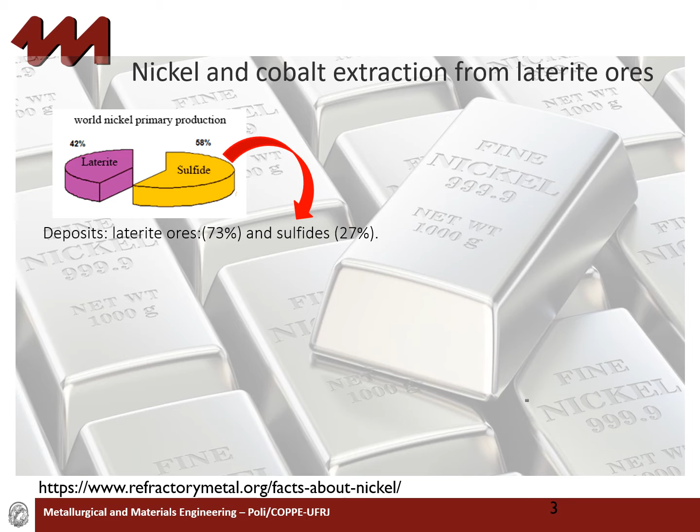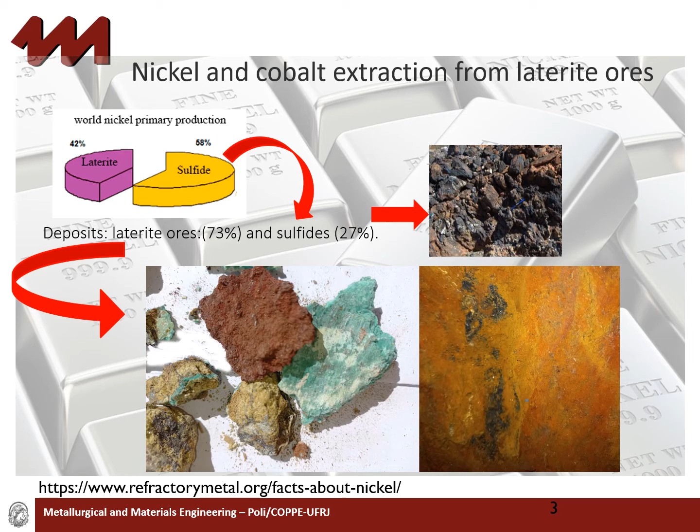Nickel and cobalt prices have reached high levels. Cobalt upsurged in price after 2019, trending to move positively and reached more than $70,000 per ton in 2022. Nickel upsurged in price in 2016, trending to move positively and reached more than $22.5 thousand per ton.

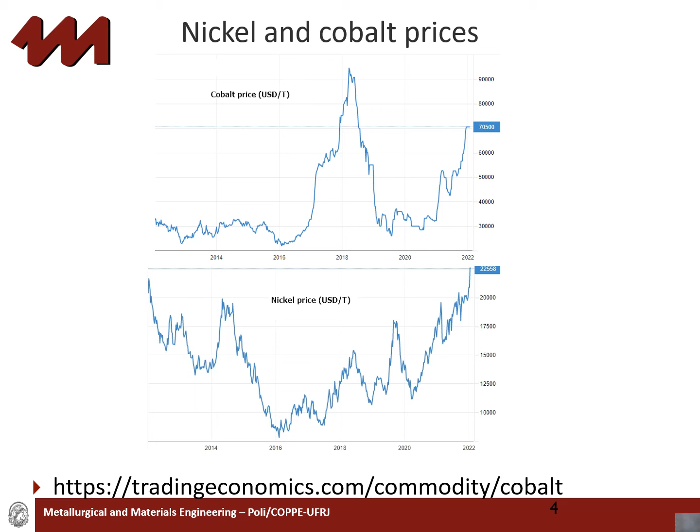Laterite ores are divided into three main types, which until now have largely been treated differently to release the nickel within. The limonite ore, which contains from 0.8 to 1.5% nickel and 40 to 50% iron, is processed mainly through hydrometallurgical routes, such as acid leaching.

The transition ore, which contains from 1.5 to 4% nickel and 25 to 40% iron, is processed mainly through pyrometallurgical routes or a hybrid route called the Caron process.

The saprolite ores, which contain from 1.8 to 3% nickel, 10 to 25% iron, and 15 to 35% magnesium, are processed mainly through smelting routes.

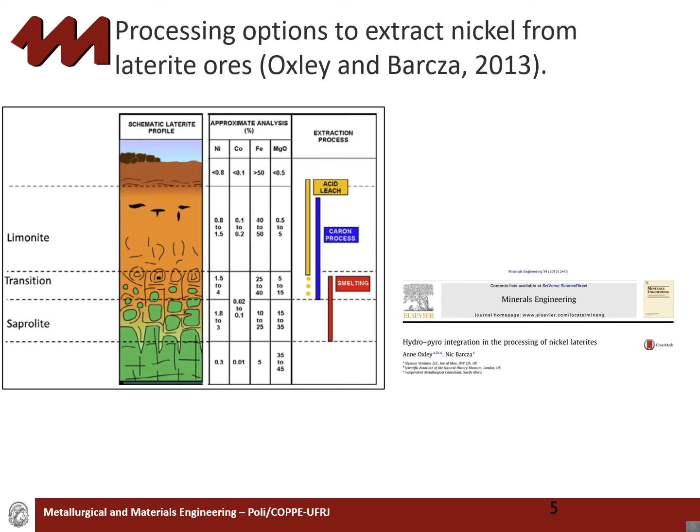The sulfation roasting leaching basically consists of sulfating the ore sample with concentrated sulfuric acid at room temperature plus water. The sulfated sample is subjected to heat treatments at temperatures ranging from 200 to 700 degrees, in one or more stages. In this case, it was done in two stages.

The first, called pre-roasting, done at 265 degrees Celsius for 60 minutes, and the second heat treatment, called roasting, was done in the temperature range from 680 degrees to 830 degrees for 20 minutes.

After the sample's heat treatment, the sample is cooled to room temperature and finally leached with water. During leaching, water-soluble sulfate dissociates, leaving metallic ions in solution.

Iron, after heat treatment, tends to remain as oxide, which presents low solubility in low acid water solution. So iron concentration in the pregnant leach solutions is low. Finally, filtration of the leached product will give us a PLS, the pregnant leach solution, and the solid leaching residue.

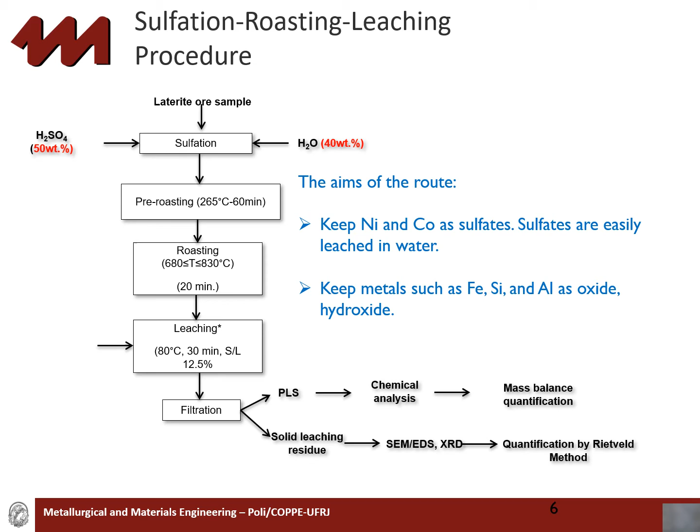The pregnant leach solutions will be carried to make the chemical analysis and finally the mass balance, while the solid leaching residue will be analyzed by SEM-EDS (scanning electron microscope with EDS) plus XRD. Finally, the samples were quantified by the Rietveld method.

So how does the route work? First, the sulfation. The main minerals present in the ore are goethite and hematite. They will react easily with the sulfuric acid to form ferric sulfate.

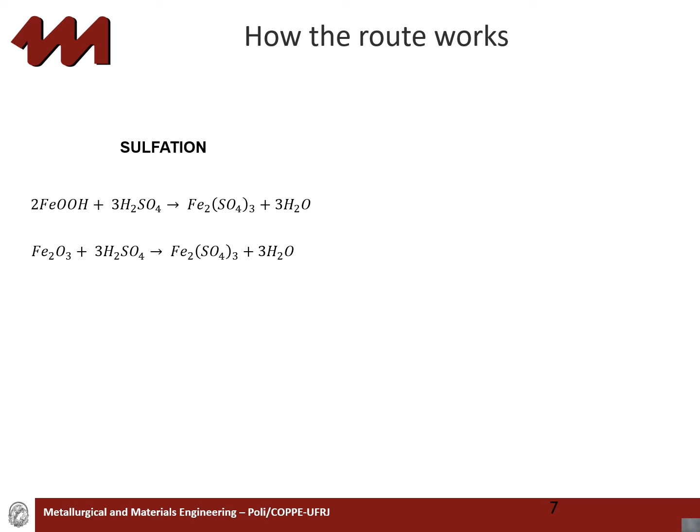Due to their instability in the temperature range used, the trivalent sulfates like ferric sulfate and aluminum sulfate will decompose, releasing SO3 during the pre-roasting and roasting steps. This sulfur trioxide will react with other metal oxides present in the ore sample. The temperature range evaluated tends to increase the formation of metallic sulfates, such as those of nickel and cobalt, which are more stable than iron and aluminum sulfates.

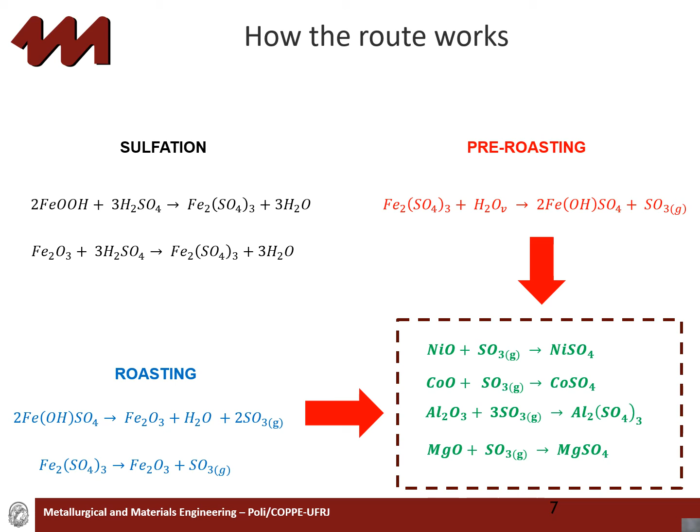Four different samples of nickel laterite ores from different regions of Brazil were investigated. The samples were denominated limonite W, red limonite X, limonite rich in chalcedony Y, and limonite Z.

It was received 5 kilograms of each sample. All the samples were quartered using a Jones riffle sampler. The dry sieve was the technique used to make the sieve of the samples, performed by a Rotap sieve shaker.

The chemical analyses were done by atomic absorption, and the roasting tests were carried out in a muffle furnace.

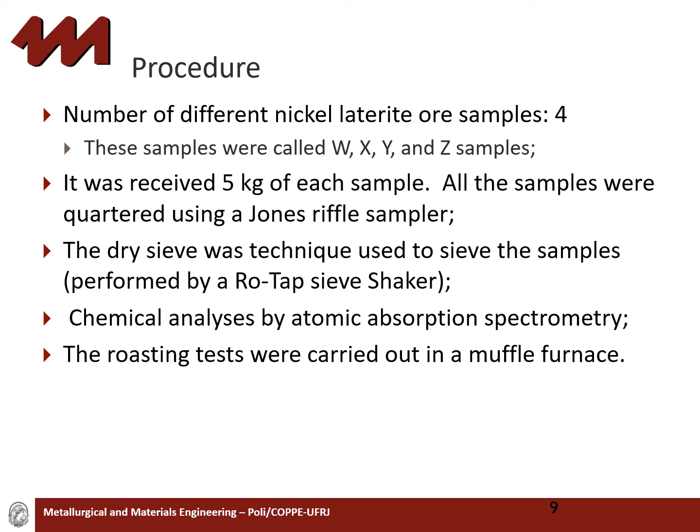The X-ray diffraction analyses were performed with a Bruker D4 Endeavor diffractometer with cobalt radiation, iron filter, and a position sensitive detector (PSD). For the quantification of the minerals and phases present in the ore, the Rietveld method-based mineral quantification with a fundamental parameter approach was used, with the software Topas 5.0. The crystal structure information for the minerals was supplied by the Bruker structure database.

The image analyses were performed with a scanning electron microscope coupled to an energy dispersive X-ray spectroscopy system and detector.

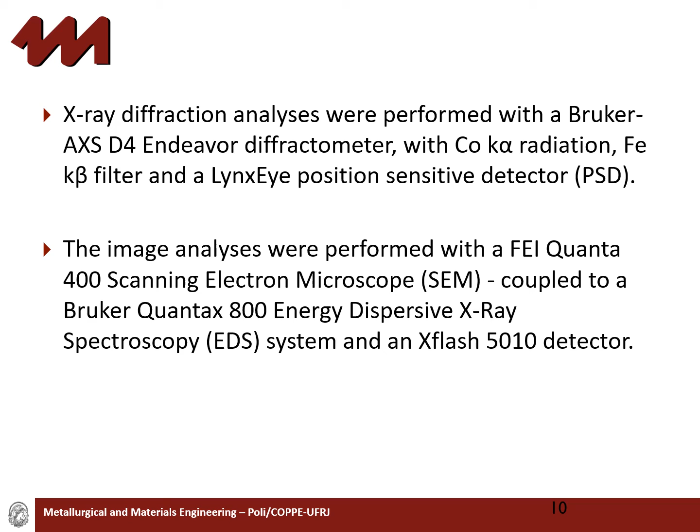The composition of the raw ore after drying for sample W can be observed in this slide. The iron content was higher than 30%, while nickel, cobalt, and magnesium contents were higher than 2%, 0.1%, and 4% respectively. It's also possible to see the quantification of the main nickel and cobalt carriers in this ore.

Sample W was composed basically of quartz, goethite, chromite, lizardite, hematite, chlorite, and magnetite. The main nickel-bearing phases are chlorite with more than 73.6%, goethite with more than 19.4%, and lizardite with more than 5.4%.

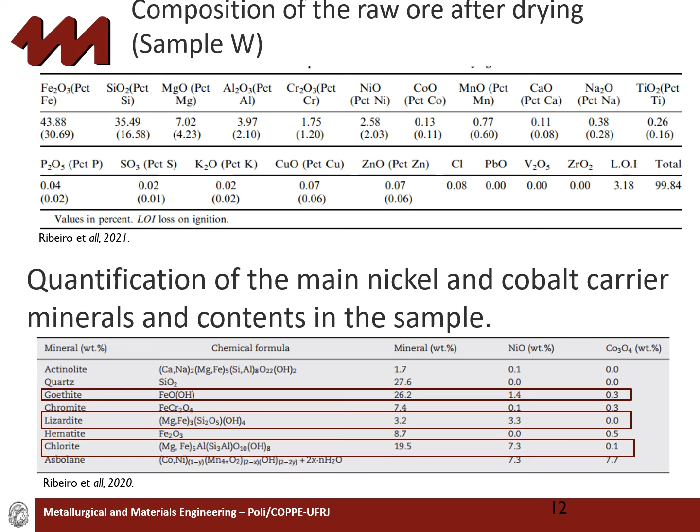For samples X, Y, and Z, nickel, cobalt, iron, magnesium, and silicon content, as well as nickel distribution in the main minerals, can be observed in the following table. Other minerals can be asbolane, tridymite, or amorphous phases.

The characterization of the ore samples was carried out with deslimed samples. However, for processing tests, samples were processed without desliming.

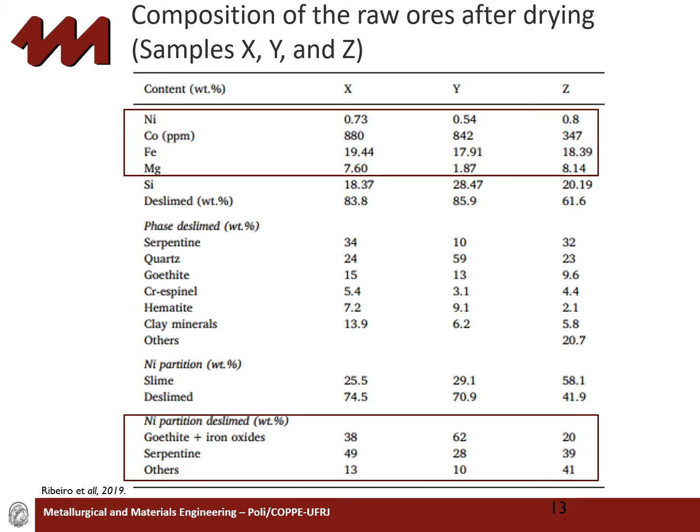The content of the minerals present in the sample during each step of the processing can be observed in this figure. The main sulfate phases found after the pre-roasting and roasting heat treatment were moorhouseite, which is a nickel and cobalt carrier, magnesium sulfate, chromium sulfate, quenstedtite, and rostite. The percentage of the last two phases decreased considerably after the roasting step, while the amount of magnesium sulfate and moorhouseite increased.

In terms of mass, however, magnesium sulfate showed an increase of about 6.5 times compared with the amount found at the pre-roasting step. Moorhouseite, however, had a 9.3 drop in mass verified after the roasting step. There was a substantial increase in the amount of hematite, around 400%, in the residue compared to the quantity in the raw ore sample.

This results mainly from the transformation of goethite to iron sulfate and their subsequent decomposition to hematite, and the decomposition of non-reacted goethite. Furthermore, in the case of silicates, the acid attacks the structure of the phyllosilicates, breaking the bonds of the octahedral and tetrahedral layers, leading to the dissolution of the elements of the phase and transformation to leachable amorphous silica. This attack explains the decrease in the amount of chlorite, indicating that this mineral reacted with sulfuric acid and/or the gas SO3 or decomposed during the thermal processing.

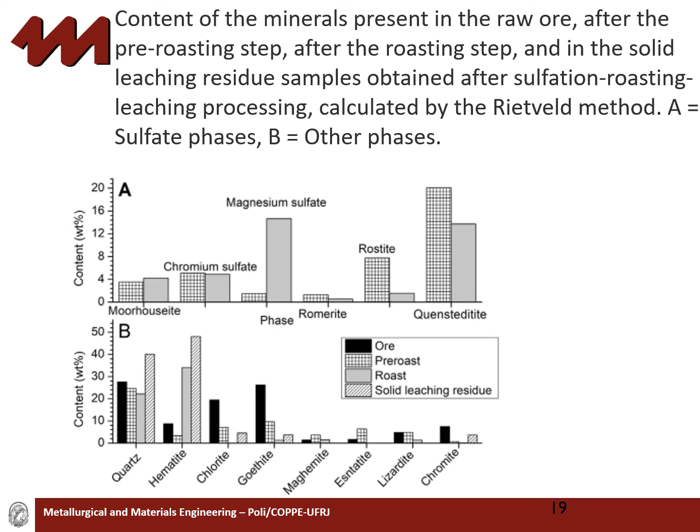The quality of the refinement was analyzed by the mathematical parameters RWP and goodness of fit, which indicate the quality of the refinement, and they were in the range from 2.35 to 2.80, and 1.69 to 1.88 respectively. These values are indicative of good quality refinement.

The visual inspection of the obtained and calculated diffractogram spectrum, as well as the residual difference of the measured and calculated diffractograms, also present a very good fit.

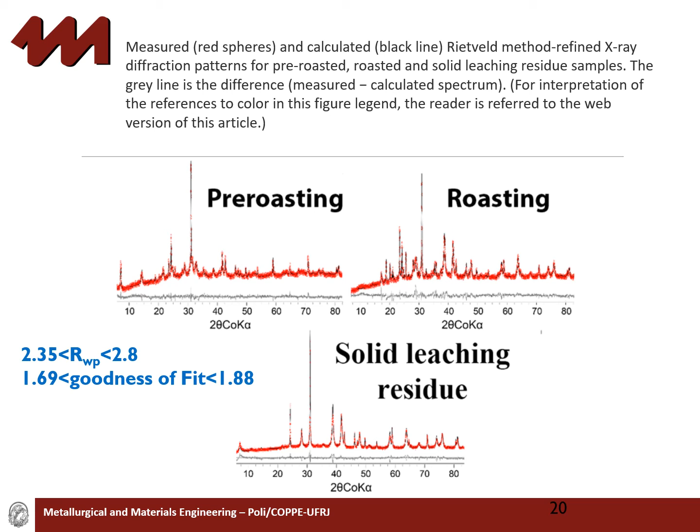The relationship among the four main phase components found in samples X, Y, and Z and in the processing residues is presented in this figure. It can be noted that quartz and hematite content in the residues increased substantially in relation to their concentration in the original ores. This increase is essentially due to the conversion reactions of ferric sulfate formed during sulfation and pre-roasting, as well as the reaction of minerals containing silicon in their structure to form quartz.

The amount of lizardite in X and Y samples was quite different, 34% and 10% respectively. But in their leaching residues, both were smaller than 1.6%. These results make evident that practically all of the magnesium present in the lizardite octahedral sites reacted with the acid during sulfation or with the gas released during the roasting step.

The decrease from 34 to 1.5% of serpentines, mainly lizardite, in the X sample also indicates that almost all of the nickel was extracted from this phase, and goethite is the phase in the residue with more nickel. The higher amount of magnesium in solution from serpentines affected the extraction of nickel incorporated into goethite. The amount of goethite in the X sample, unlike the Z sample, can be considered high and equal to 5%.

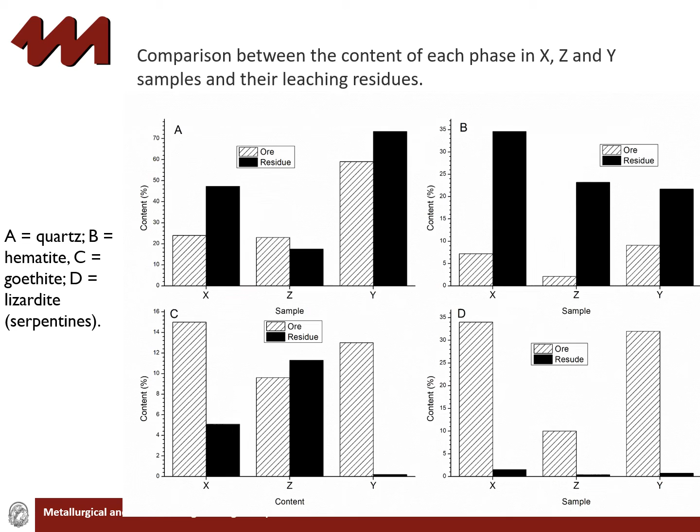The best results were obtained by the sulfation at room temperature, followed by pre-roasting at 265 degrees for 60 minutes, roasting at 780 degrees Celsius for 20 minutes, followed by cooling until room temperature and leaching with water.

The nickel and cobalt extraction were higher than 80% for samples W, X, and Y, while for sample Z, the iron content was high, but the most significant analysis was the nickel extraction, which was smaller than 77%. This is explained by the amount of amorphous phase found in the sample and also because of the high amount of magnesium.

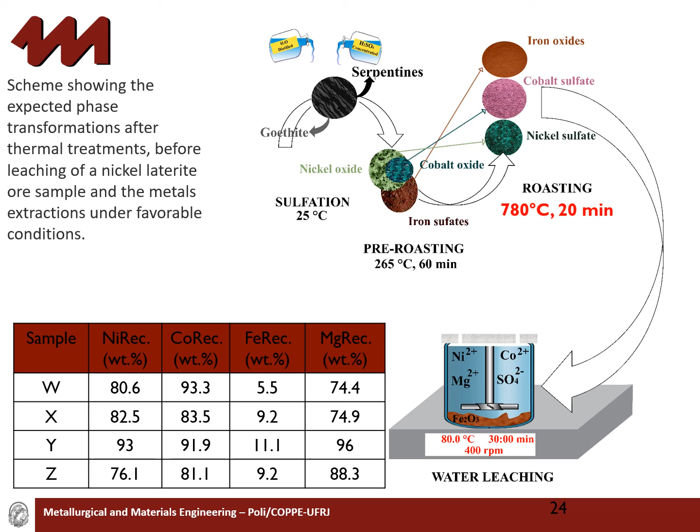Conclusions. The mineralogy of the solid leaching residues of laterite ore samples determined by X-ray diffraction includes hematite, quartz, goethite, chromite, ilmenite, lizardite, vermiculite, tridymite, and spinel. Amorphous phase was also detected in some samples.

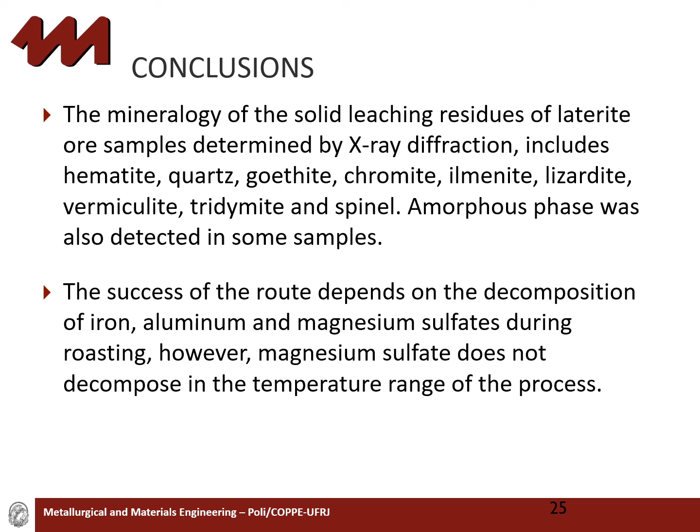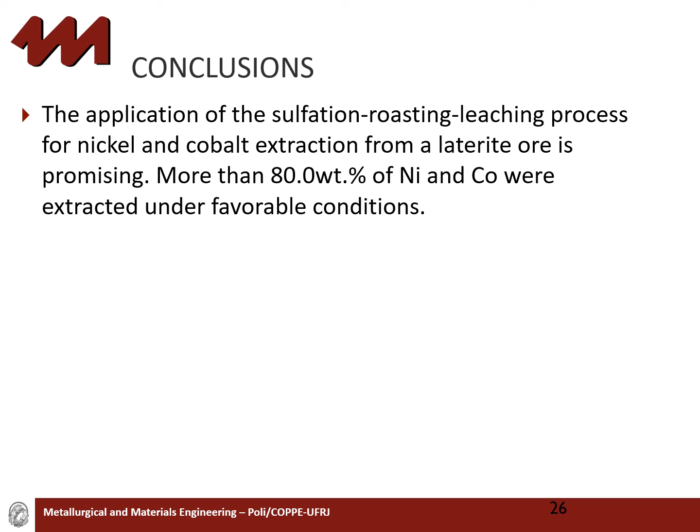The success of the route depends on the decomposition of iron, aluminum, and magnesium sulfate during the roasting. However, magnesium sulfate does not decompose in the temperature range of the process, increasing the acid consumption. The application of the sulfation roasting leaching process for nickel and cobalt extraction from laterite ore is promising. More than 80% of nickel and cobalt were extracted under favorable conditions.